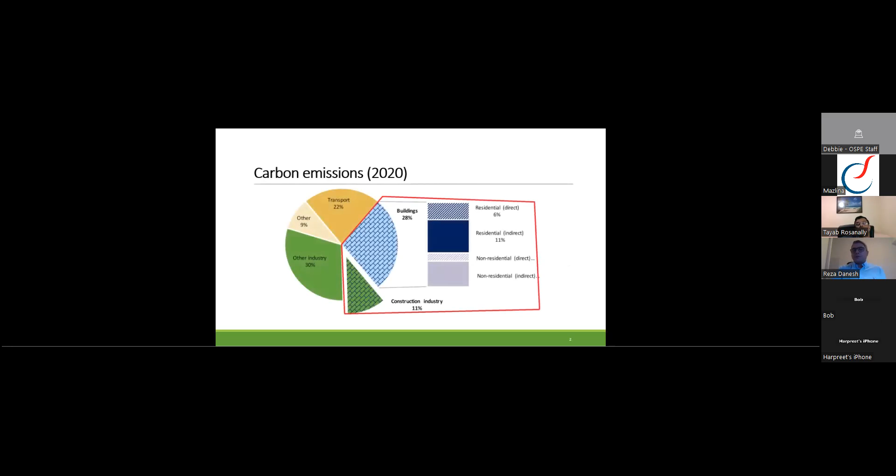We spend the majority of our lives in buildings, so our houses, offices, and community centers require heating, cooling, and lighting. In Canada, buildings produce 12% of our national emissions, mostly space and water heating. If you add the indirect emissions from using electricity, that share jumps to 17%. And again, it's just for the residential. And in making them more energy efficient, they represent a big economic opportunity.

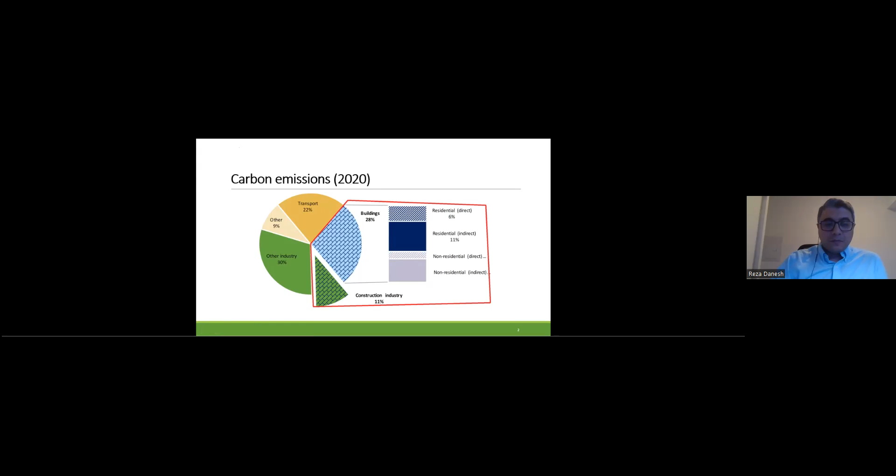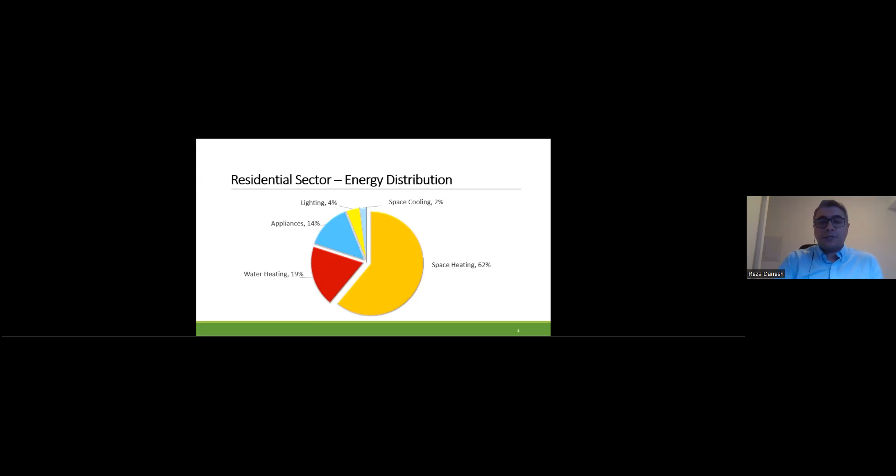As you can see here, we have a large portion of heating in our energy distribution for the residential sector. Considering water heating, space heating, and space cooling all together, they are accountable for 83% of the total energy used for residential buildings. So by coming to this point, we can see there's a big opportunity to consider net zero energy buildings.

Let's see what's a net zero energy building. The basic definition of a net zero energy building is that it generates as much energy as it uses over the course of a year. This building is directly connected to the electric grid for balancing energy production and use annually. When the grid goes down, the building goes down as well, and it's pretty simple like this.

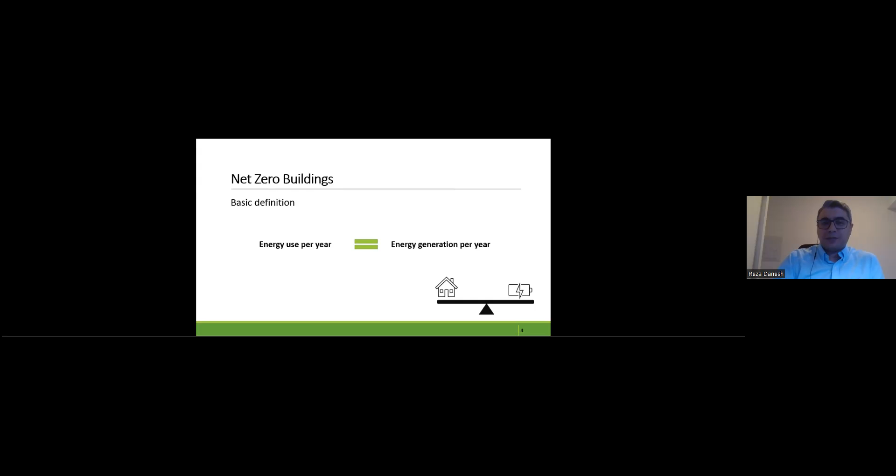But we have to consider the site boundaries for the energy transfer within the building, and we are going to keep it pretty simple. Let's see what's the site boundary we are talking about. The site boundary represents a meaningful boundary that is functionally part of the buildings. So for example, for a single building on a single property, the site boundary is typically the property boundary, just the lot we are talking about. The site boundary should include the point of the utility interface.

So considering this figure, you can see the site boundary of energy and how it forms from building energy, on-site renewable energy production, delivered energy, and exported energy. In here, we have two types of lines. One of them is the dashed line. Let me just grab my laser pointer.

We have the dashed lines, and we have solid lines. The dashed lines represent the energy transfer within the boundary, which means they are on site. And the same thing as solar panels, some of our houses have them, not all of us. But also we have some delivered energy from the grid. In the meantime, some of the buildings that are well prepared and functionally better than a normal building can export energy to the grid.

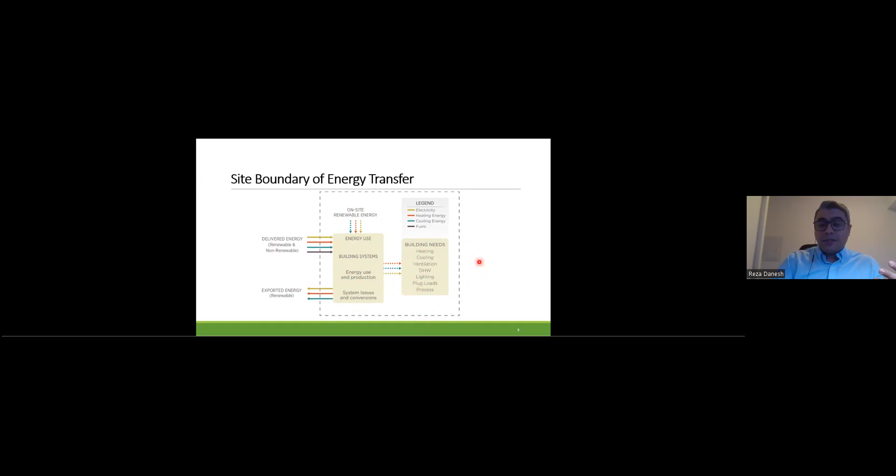And we are going to talk in detail about each part of these energy sections in the next slides. But the basic needs we have to consider in buildings are mainly heating, cooling, ventilation, and DHW, the domestic hot water heating, lighting, and considering the plug loads and the process of the whole system.

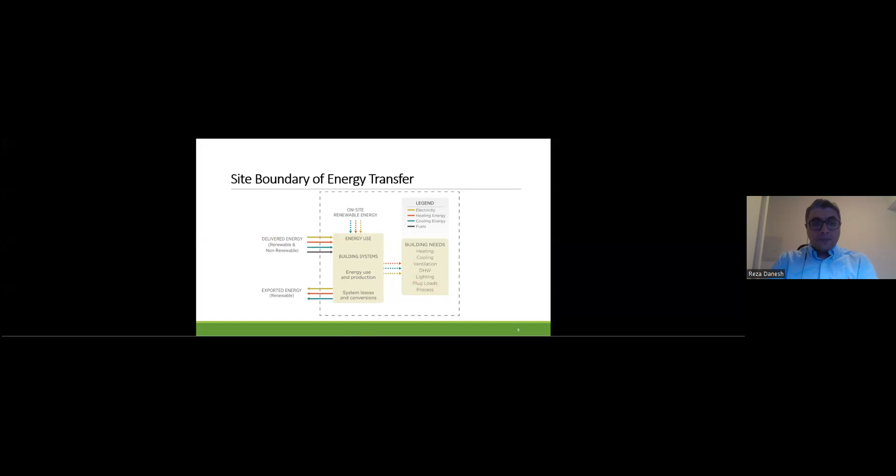But in the definition, we have four main different net zero energy buildings. But again, it's in particular from one of the definitions to be considered. Some textbooks or maybe some firms or some countries might have different definitions. And we are talking in particular about North American firms and companies for these definitions.

The first one, which we are going to talk about, is the net zero energy by site. The second one is the net zero energy by source, then net zero energy by electric, considering the electricity, and the final one will be the net zero energy carbon. We are going to talk about each of them in detail, but I will mostly go through the net zero energy carbon part.

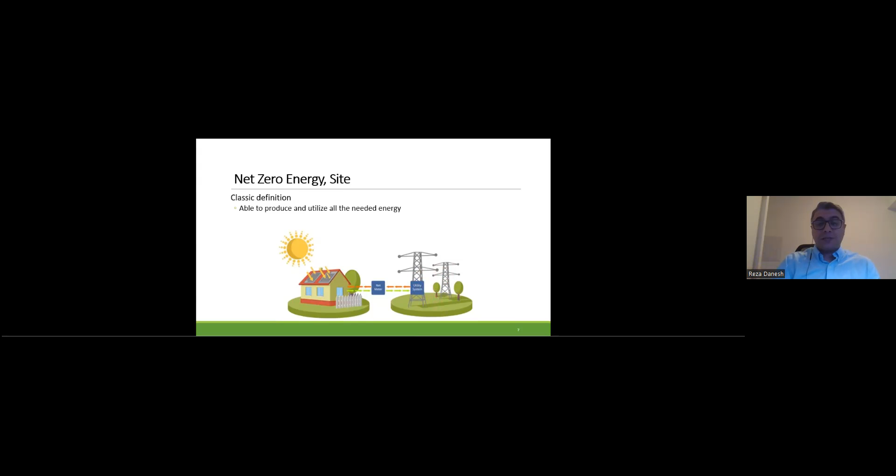For the net zero energy site, this is just a classic definition of a net zero energy building, which is able to produce and utilize all the energy needed for a year on site. Traditionally, these buildings rely on the electric grid as the storage provider to balance energy needs, which means during the day they usually store the energy and export it to the grid, but during the night they usually use it from the grid. So we consider a balance in this area for these types of buildings to consider them net zero energy on site.

Another part is the net zero energy by source. This definition looks to balance a building's energy use and the energy losses of the energy grid providing it. And it's pretty rare to consider these types of net zero energy buildings. Different energy grids have published energy loss factors for using electricity and natural gas. By considering all of these losses, a building is accounting for its larger footprint and energy needs. This is a way to account for average grid carbon emissions today, since accounting for energy use at the building and upstream on the grid is the same as accounting for carbon emissions.

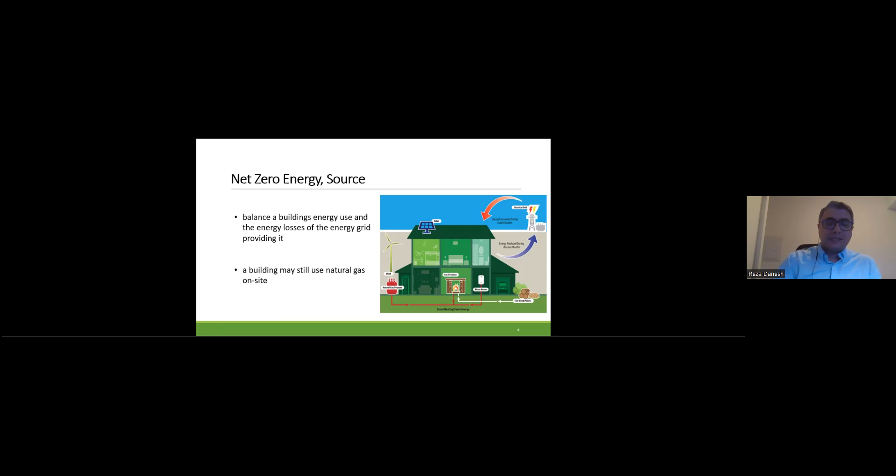This definition of a building may still use natural gas on site or other forms of combustibles. The grid impact is lower for gas since it's converted at the building. Sharing operating costs between fuel types can be difficult, and often energy generation on site from electricity cannot count towards equivalent natural gas cost benefits. As I mentioned, it's pretty rare to consider this definition, but we still have it as a part of net zero energy buildings.

The other one, which is much more familiar to people about net zero energy buildings, is considering the electricity. For this one, we are mostly talking about commercial buildings, and they call themselves net zero electric, which means all the electricity used on site is balanced with energy generation, typically on site as well. Often buildings which still use natural gas for some heating or cooking opt for this definition as a way to deliver building efficiency and reduce energy costs. There is no official organization which provides a certification for this achievement. It's often used by private developers or large agencies with energy performance criteria for buildings.

And when we are talking about net zero energy buildings, mainly we want to get the certification for a building. It's not the same as LEED, because a building can be LEED platinum or LEED gold, but it doesn't need to be exactly net zero energy. So these are both together to have a completely functional and efficient building.

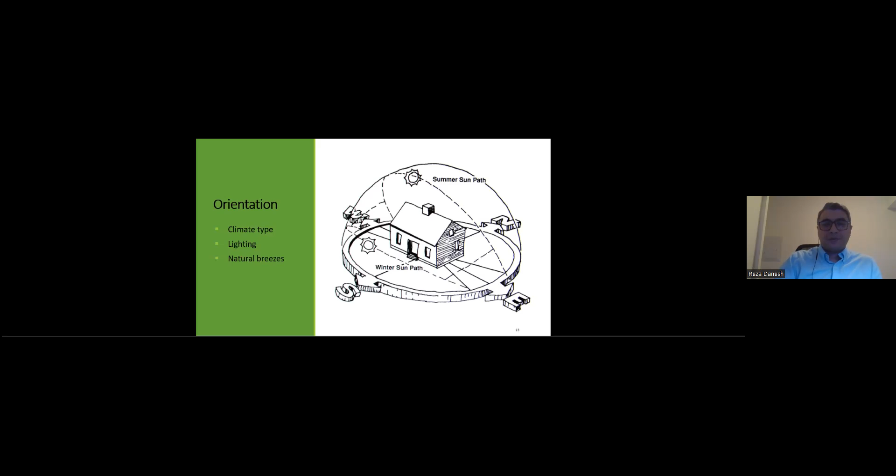And considering the passive strategies, so what are the passive strategies? One of the things to make our building a green building or net zero building is considering its design and the passive strategies to make it much more efficient. We have to make sure to select the best insulating materials possible so the building conserves as much energy as possible. Windows are another option. Maybe 10 years ago, we were talking about dual pane panels. But these days, we are talking about triple pane panels, which are effectively sealed. They can be a major factor in conserving energy.

Passive strategies aren't about energy production. They're about minimizing the energy use and maximizing the energy performance. So we are trying to conserve energy by the passive strategies, and we are not talking about producing any energy here. In fact, they operate without energy use, which is why they help buildings achieve net zero energy use. One of the things to consider at this point is high efficiency appliances. They require less energy and lighten the overall energy bill. The same thing can happen by considering low energy HVAC systems.

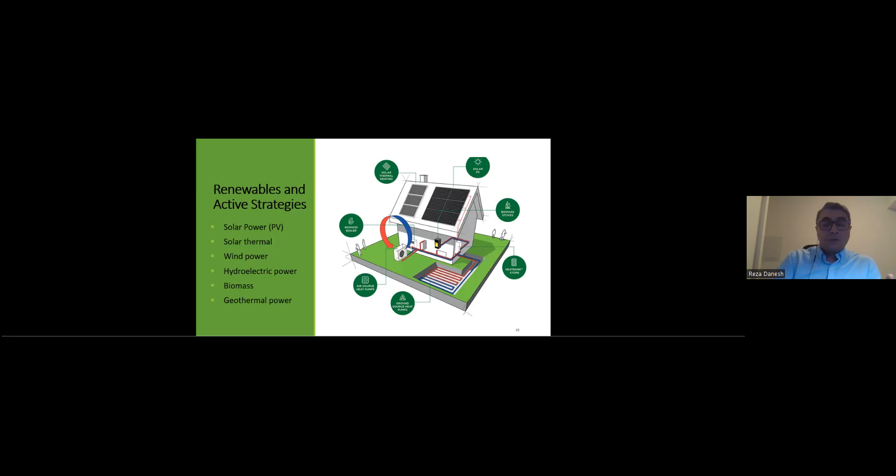Another thing we can consider, again in California, is the parabolic trough collectors. They're just half a cylinder, and there's a tube in the middle at their focal line, so they can be used. Even the good parabolic trough collectors can reach up to 500 degrees C, which is a high temperature for a building.

But there is something we have to consider. If we are constructing a building from scratch, we can consider those things together. But we cannot simply say let's demolish our place and build from scratch - we have to retrofit different buildings.

Simply retrofitting your buildings won't automatically create net zero energy savings. Slight changes might not be enough - just adding solar panels doesn't mean you have a net zero energy building. Furthermore, every case is different, so we cannot have a one-size-fits-all approach. The amount of work depends on how extensive the modifications need to be, factoring in climate, the building's original design, structural stability, and material use. These all affect the cost of the project, which is the important point.

Although retrofitting is almost always less expensive than starting from scratch, we can also consider tax incentives and other stimulus which can offset long-term costs. And with good retrofitting, you can actually sell your energy back. In different countries, I know the price per kilowatt hour is different.

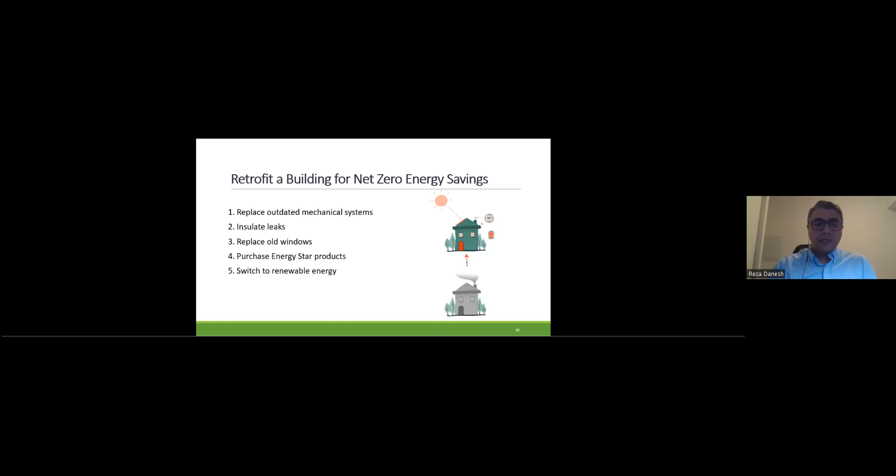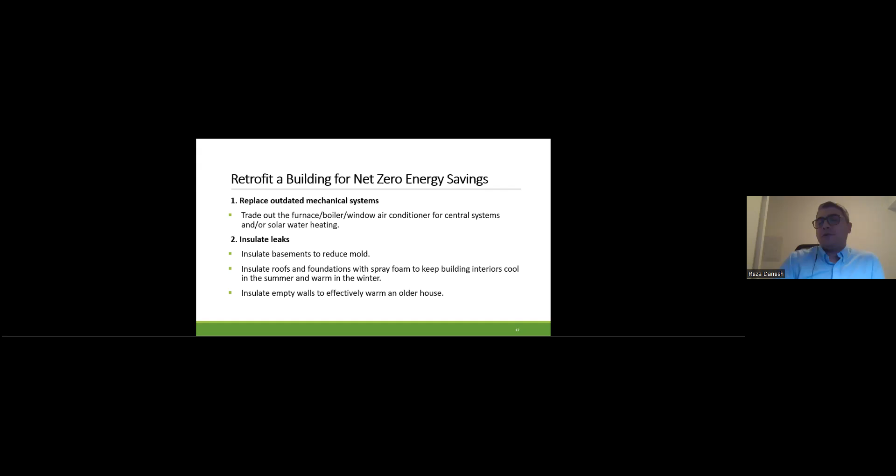The first one is replacing outdated mechanical systems. It's pretty straightforward - trade out the furnace, boiler, or window air conditioner for a central system or solar water heating. Insulating leaks is similar: consider insulating your basement to reduce mold, insulate roofs and foundations with spray foam to keep building interiors cool in summer and warm in winter, and insulate empty walls to effectively warm an older house - the drywall usually has to be filled in.

Also, you have to consider replacing your old windows. Windows are similar to insulation - they prevent climate controlled air from escaping while keeping air and water from getting into the house. Triple pane glass windows are the best option for maximum energy efficiency, compared to dual pane design, though triple pane is more efficient. Windows should be installed properly to prevent water damage or air infiltration for optimal energy efficiency.

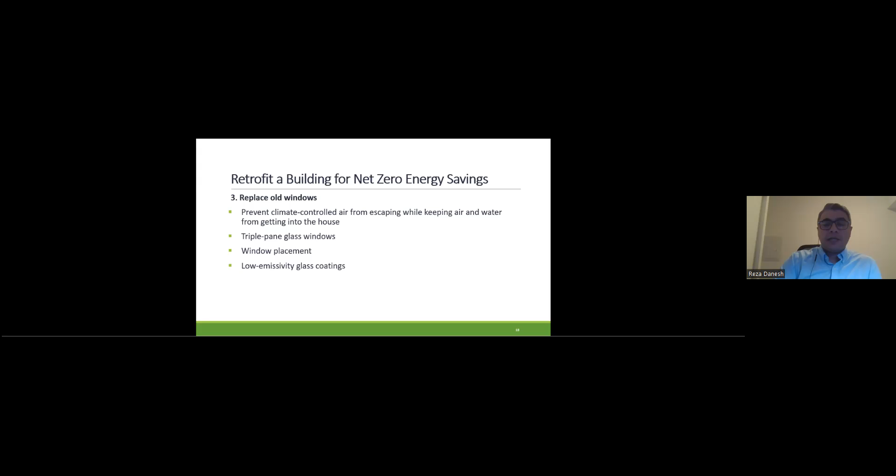Also, the placement of windows is important. For example, windows placed on east or west walls can waste twice as much energy as those facing north or south, because they face direct sunlight in the mornings and afternoons respectively. We also have to consider low emissivity glass coatings, which reduce the amount of infrared and UV light that passes through the glass, without affecting the amount of visible light that comes through. These coatings help keep our interior cool by reflecting heat in summer, retain warmth by reflecting cold air during winter, and prevent fade damage by blocking UV rays.

The next point is purchasing Energy Star products. When we usually talk about energy products, we think of refrigerators, washers, and dryers, but there are also Energy Star products for furnaces, central or room air conditioners, air source heat pumps, and ground source heat pumps. Energy Star also certifies building products including roofing products, insulation, storm windows, residential windows, doors, and skylights. They might be a bit pricier, but it's good in the long run considering the bills.

And the other thing, if the budget allows, is to retrofit to produce your own energy using various types of renewable energy sources to help conserve energy. As we talked about, wind power is not feasible for a residential building, but if it's offsite it can help the electricity grid, benefiting residential buildings, condominiums, or apartments. It's the same with hydroelectric - a building cannot have a hydroelectric dam, but a city can, so it can be part of a bigger picture for renewable energy saving.

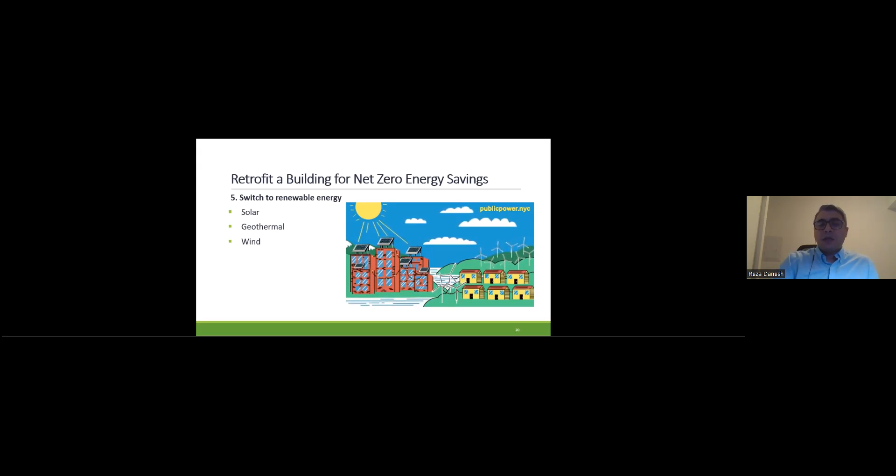But we have to consider there are several barriers in Canada. One of them is the knowledge barrier, which refers to both knowledge deficiency about the science and technology of net zero energy homes, and knowledge inadequacy about how to use them.

A net zero energy home has the potential to reduce energy use while adding security to the energy supply, both of which can be a relative advantage compared to conventional houses. However, the upfront technology cost remains a barrier. Homebuyers tend to justify their purchases based on immediate visible costs and investments, not the potential future benefits arising from energy efficiency or lower long-term environmental harm.

The other thing to consider is the economic feasibility of purchasing a net zero energy home, which remains a barrier to adoption. Conventional house construction firms are not interested in zero carbon buildings due to steep construction costs, limited access to construction funding for these kinds of projects, and high demand uncertainty in the market. That's the reason we don't see that many net zero energy buildings these days.

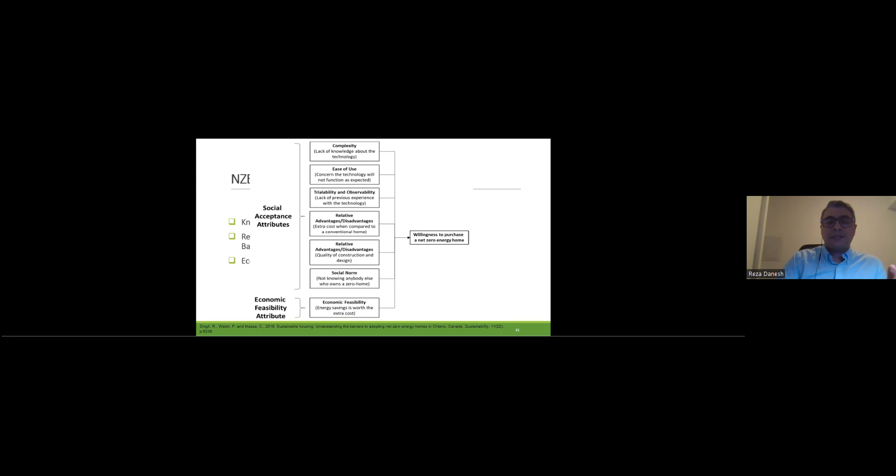Considering a model for addressing all the barriers that affect consumers' willingness to adopt net zero energy housing, we have social acceptance attributes and economic feasibility attributes, like the complexity, the ease of use, relative advantages and disadvantages, such as the extra cost compared to a conventional or typical home. All of these have to be considered together. In the meantime, we have to educate people that we are going to need these buildings for our green future. But let's talk about bigger plans.

For example, in Maryland we have the largest net zero energy building in the world. It's a huge building spread across an area of 135,000 square feet, called Unisphere. It's in the middle of the city, in downtown Silver Spring, and it has all the technologies we are thinking of.

It's a complete net zero energy construction, completed in 2018, and it's now the world's largest office building that works on the concept of zero energy. And it's actually working now, not just on paper.

The Unisphere combines automations like solar PV systems, geothermal wells, high-performance electrochromic envelopes, an earth-coupled heating and cooling system, and a thermal pool. All together, they help the building function with no carbon footprint.

This building sells more energy than it buys from the grid. In particular, it has 3,000 solar panels plus extra space for 1,000 more, and they are selling the electricity from those 1,000 solar panels to the government. So they are producing somehow a kind of payback for the investment.

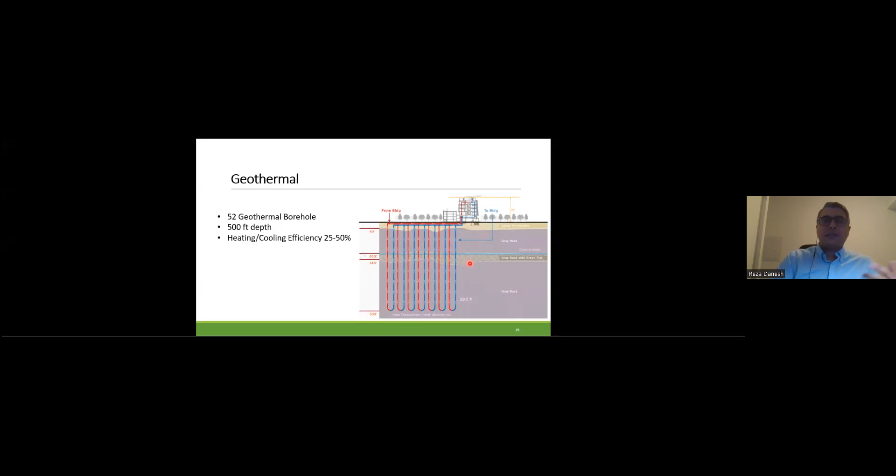During winter we have an 8 to 10 degree Celsius heat source, which we can use to heat up our water and space. During summer it can be the vice versa, and we can cool down our places.

One thing I wanted to show is the thermal pool. It's really beautiful because the concept is almost ancient — it comes from traditional homes in the Middle East, mostly in the Yazd part of Iran. It's a completely hot city, but they can cool down their places without having air conditioning systems.

So in conjunction with the geothermal well system, the thermal pool also helps the building's efficiency by lessening the load of the HVAC system, which is located in the building atrium. The thermal pool also serves as a source of evaporative cooling and heat rejection.

And let's come to Canada and talk about our buildings. The very first building in Canada to be certified as a zero carbon building under the Canada Green Building Council is Evolv1, an urban office building in Waterloo, Ontario. The building also achieved the permanent status of being LEED Platinum certified as well.

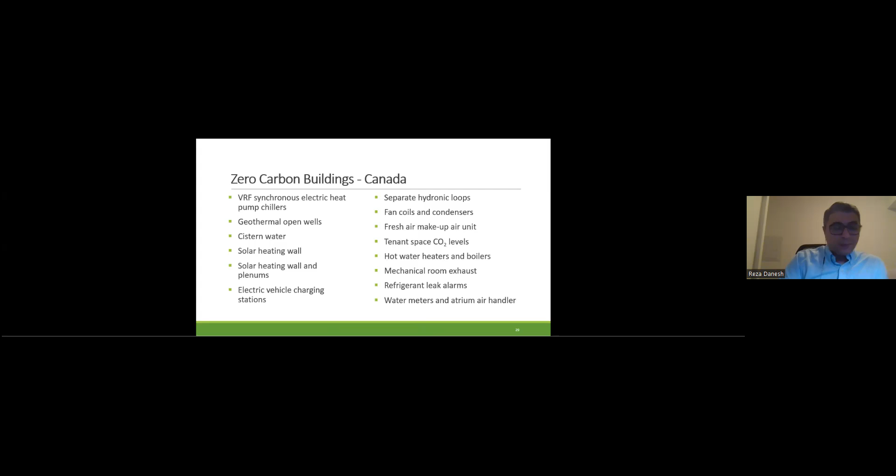But in a typical zero carbon building, we can see these systems all working together, like the solar heating wall, cistern water, geothermal, variable refrigerant flow system (VRF), solar thermal systems, hot water heaters and boilers, and so on. And it's pretty big when we are considering this.

But the main thing I want to show is, I have to say, the diamond of green buildings or energy efficient buildings in Ontario as an institutional place. So you might know the shape, and it's Mohawk College. It's the Hamilton facility, which is one of the region's first net zero energy institutional buildings

when it opened its doors to students. As the largest zero carbon institutional building in Canada, the Joyce Centre is a living lab for students, offering them hands-on access to monitoring and operation of a zero carbon building certified system. Basically, for this building, they projected around 50 million as the projected values. But actually, when they came up with the final values, they were much less than the projected values. And you can see the building size was much larger.

Also, for the zero carbon system of this building, they considered heat pumps, a geothermal field, and also a dedicated outdoor air system, solar thermal for preheating domestic hot water, and heat pumps as an auxiliary system for domestic hot water. It's the same as the previous one, as we mentioned in Unisphere. They considered different large drilled wells for the geothermal system. They considered a gigantic HRV system to make it much more efficient for the building.

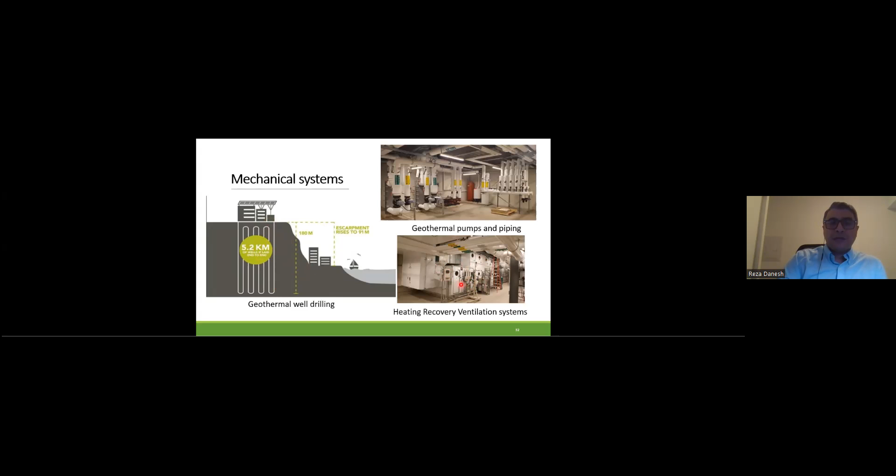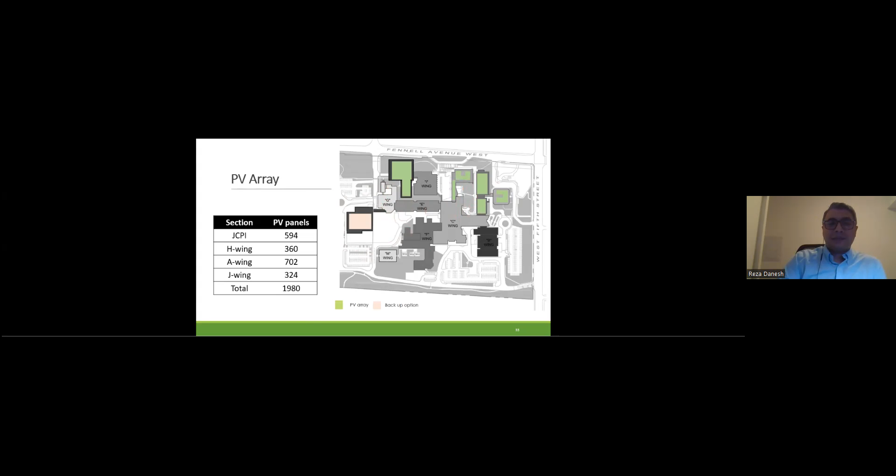And also they put 1,980 solar panels on the total area, and they also have a backup plan if there's a failure in the system; this backup plan can help the system as well. This is the whole thing you can see as solar panels, and it's a beautiful building, to be honest. If you are living in Toronto, I would suggest going to visit this place for its design.

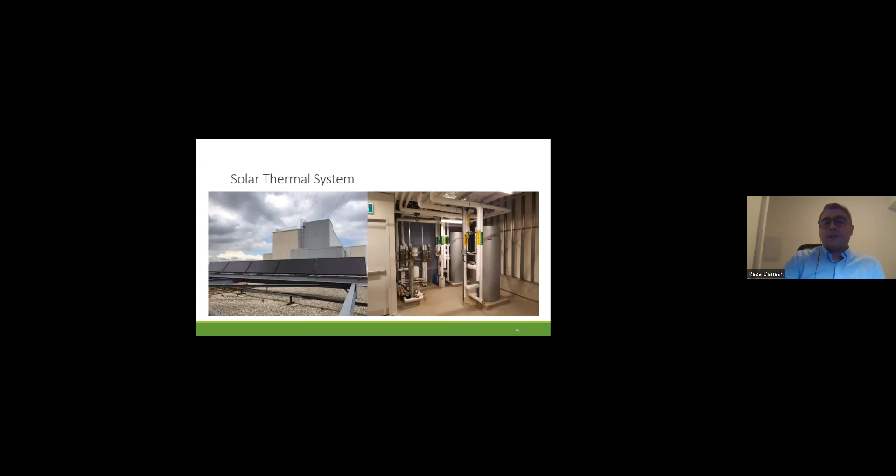And also considering the solar thermal system of this building, it's simply for domestic hot water, and they augmented condenser water loop heating. And they considered Viessmann panels, tanks and controls for this system. Meanwhile, they also considered a rainwater reservoir. And it's one of the novelties of this building, because most buildings don't consider this part.

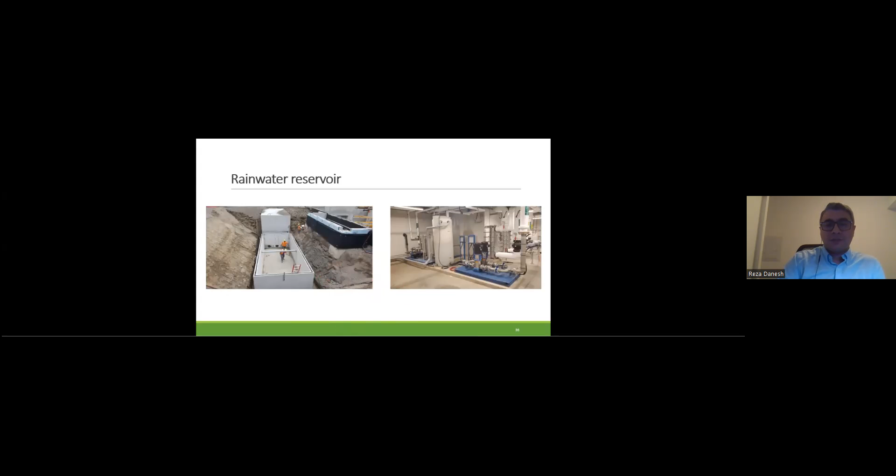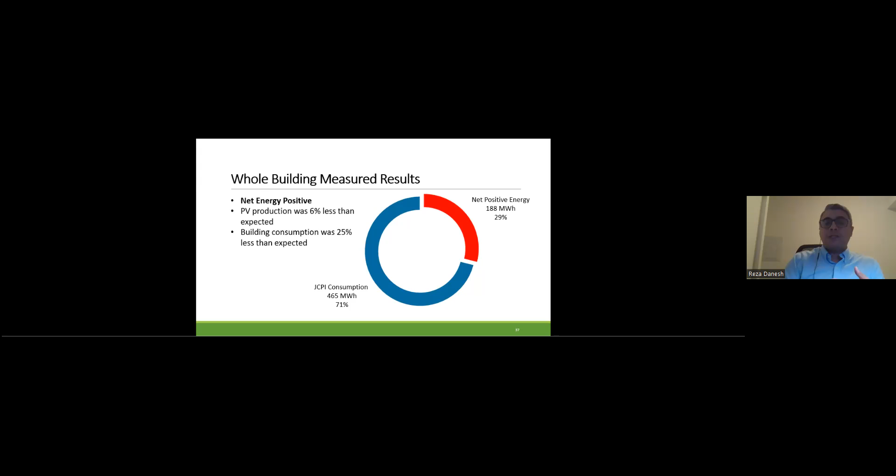And the last part I would like to mention is the study period for this building, which was actually before the pandemic. The top floor of this building wasn't fully occupied. But actually, when they went through this study, they saw everything was normal, where the PV production was 6% less than nominal, and the building consumption was 25% less than what they expected.

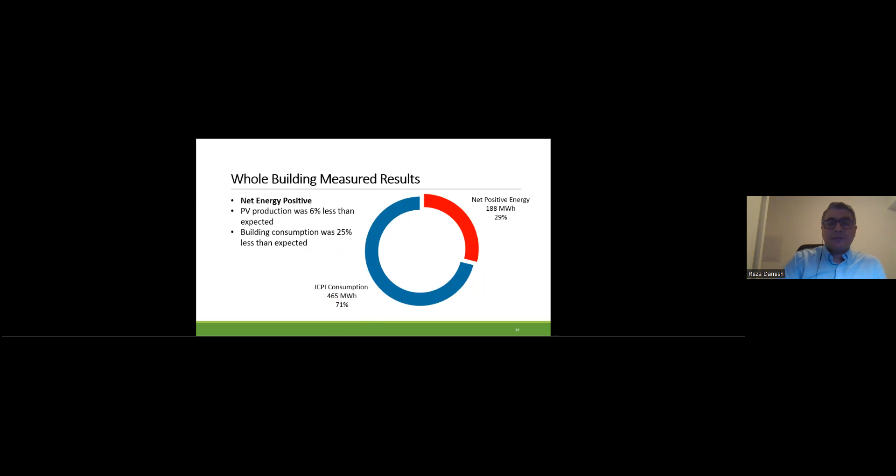So I believe I might go over the 40 minutes I had to talk. I believe I can stop here, because the rest is just the energy calculations, and I can share it later if we have time, maybe after the questions.

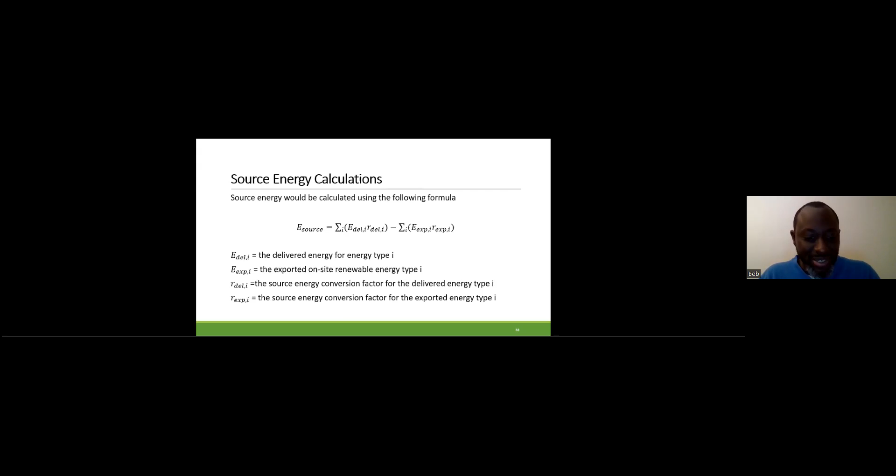Does it make economic sense to do that retrofit to net zero? Again, if you're talking about the long term, yes. But the main thing we have to consider for the retrofit is the incentives by the governments. Because some of the governments, like in Europe, they're not willing to buy the electricity produced by private places. But in Canada, it's vice versa, and that's good actually.

But things like the rates are different from one province to the other one. So it's kind of like we cannot say we can just consider one approach for all buildings. But yes, sometimes it needs just a retrofit, but sometimes unfortunately it doesn't make sense and it must be demolished and go from scratch to make it cost effective.

Okay. All right. Thank you. I have another question from Said. It says, to what extent does active system contribute to a net zero building in Canada? And how big a size of a building have you come across that has net zero, due to heating, a net zero energy building?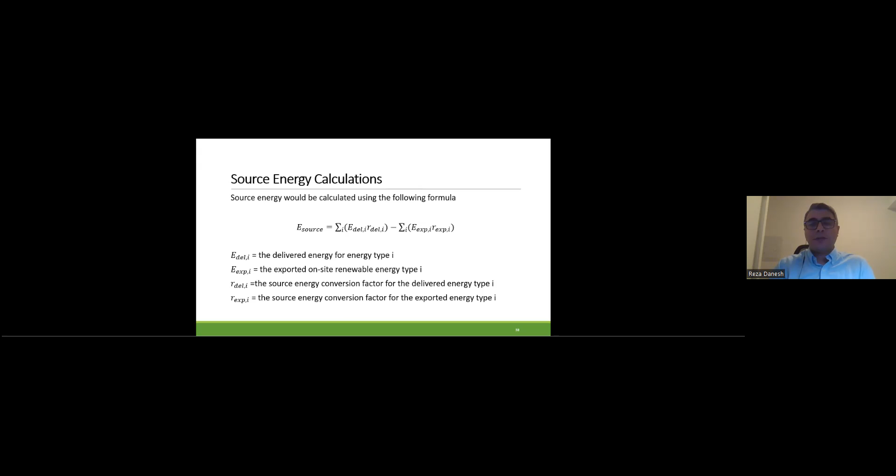So this is actually a great investment, but basically the ground source heat pump was able to produce 100% of the needed heating, for heating up the spaces and for heating up the water. But again, for North America, we can say for Canada, ground source heat pumps are the main active renewable energy part.

Okay. I think we can have this as a last question, coming from Said as well. He's saying that this works well, but once you go over 3-4 floors in the building, how is the efficiency, and what's the way forward on that? Does it still remain that efficient, or is there something extra that can be done?

Actually, for 3, 4 floors, we are talking about small residential buildings. In those cases, again, for the solar panels, yes, we can use them. There is not that much construction or drilling or installation cost for it, because they are just panels, we can put them together.

But for these buildings, if you want to consider geothermal systems, they don't need to be drilled vertically. Because when we are talking about 3 floors, 4 floors, they have a yard, which is enough space to have a horizontal system, using the site as a flat space, and we can use it as a ground source heat pump again.